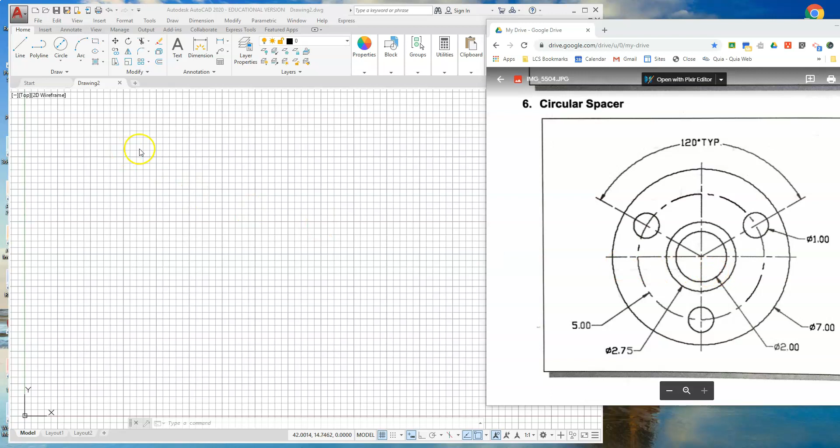So let's start laying this out. I'm going to start with the lines first, because I want to go ahead and draw my center lines for my construction lines. So I'm going to turn the grid off and just draw a couple lines.

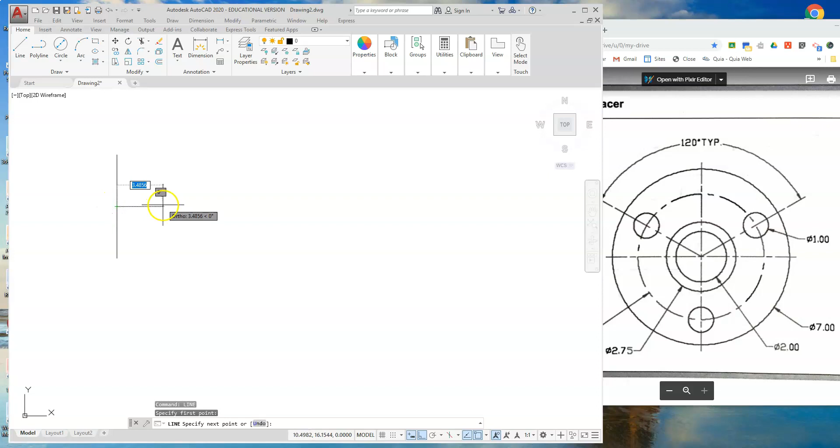So the largest diameter is 7. I'm just going to draw 2 lines, 8 inches. I'm going to draw that 8 inches down, then come up here and find the midpoint of that line, going 4 to the right. I can pick on the end of that line and move that grip, type in 4, and it will extend that line 4 units to the left. So I've got 2 lines drawn instead of having to draw just another little 4-inch line.

So I'm going to start with the largest circle. The largest circle is a 7-inch diameter. I'm going to come over here and do circle diameter, and lay that 7-inch diameter circle out. Then I'm going to go to the other 2.

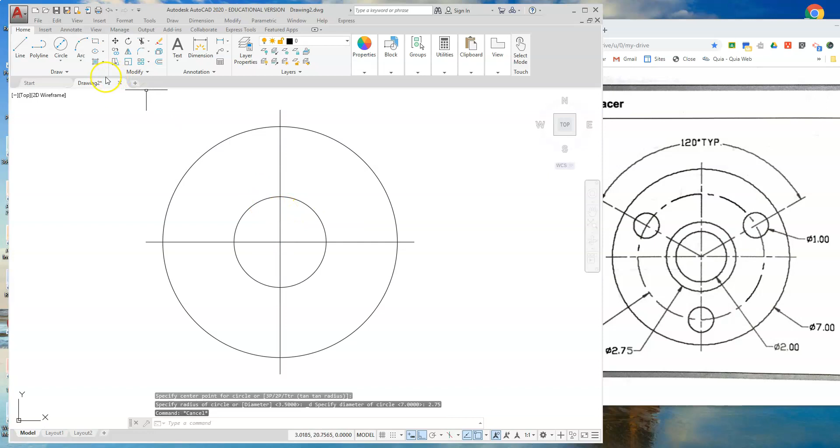These are object lines, so that means they're solid. That's why I'm going with those next, skipping over this one with the center lines. So this one is 2.75 and that one is 2. Using that circle diameter command just alleviates having to calculate the radius. I'm making sure I use the information given to me so I don't have a math error. Alright, so I've got those 3 circles drawn, and now I need to locate the other 3 circles.

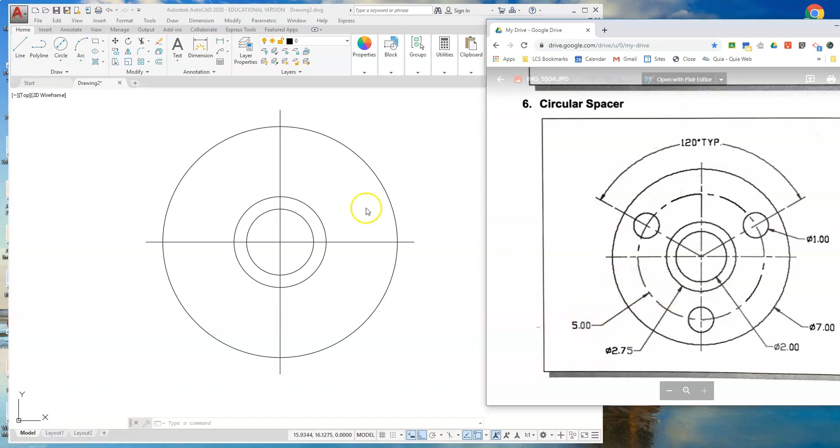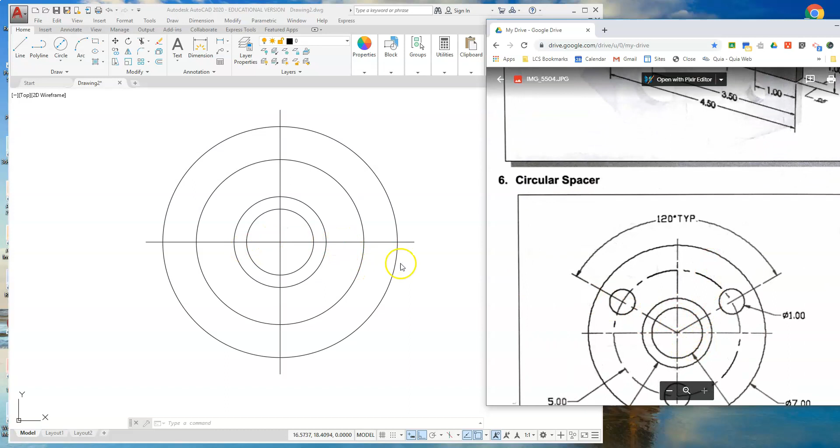Like I was showing you before, they did leave off that diameter, but that is a 5-inch diameter circle. So let's go ahead and draw ourselves out a 5-inch circle diameter. You're not going to have the center lines right now, so you'll just have to remember that that is your construction line, and we're going to use that for the 5-inch circle. So the first one is going to be located down below, where that line and that circle intersect.

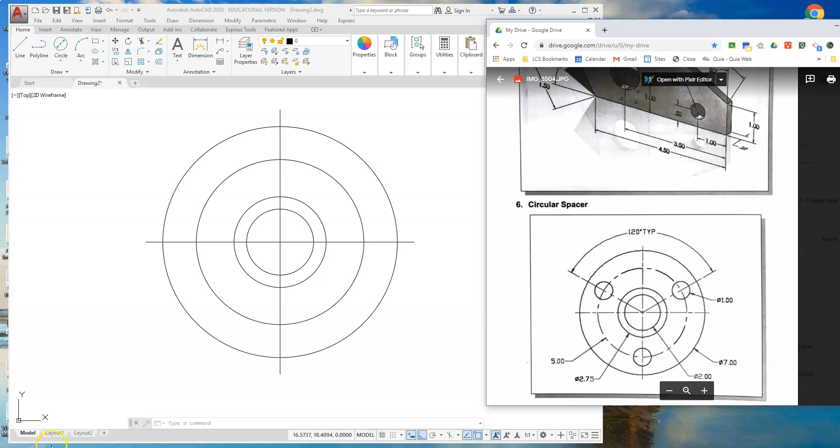What is the size? A 1-inch diameter. So typically there'll be a note here that says 3x. Let me write that on there so you'll see what that's going to look like. Alright, so typically that says 3x, diameter 1, and that would be a normal notation for that.

So we need to... let's just exit out of that. There we go. So I just want to go into my line command and draw a line for this angle here. So we've got 120 degrees. We're going to take 180, because it's 180 from here to here, of course. So subtract 120, that's 180 minus 120 is 60.

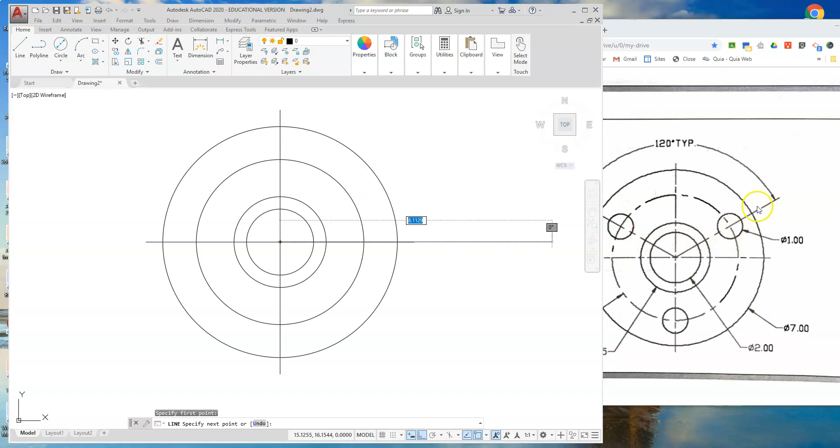So we've got 2 angles over here. There's nothing to make me believe that this isn't symmetrical. So I'm going to say 30 degrees over here on this side and 30 on this side. So I'm going to take my...

Line command and draw an 8-inch line. Turn my ortho off, 8-inch line, hit the tab button and type in 30 degrees, and that's going to be the location of the first one. And this one over here is going to be 8 inches as well. Hit tab, and it's going to be 30 off of 180 degrees, so that's going to be 150. So that's going to give me the location.

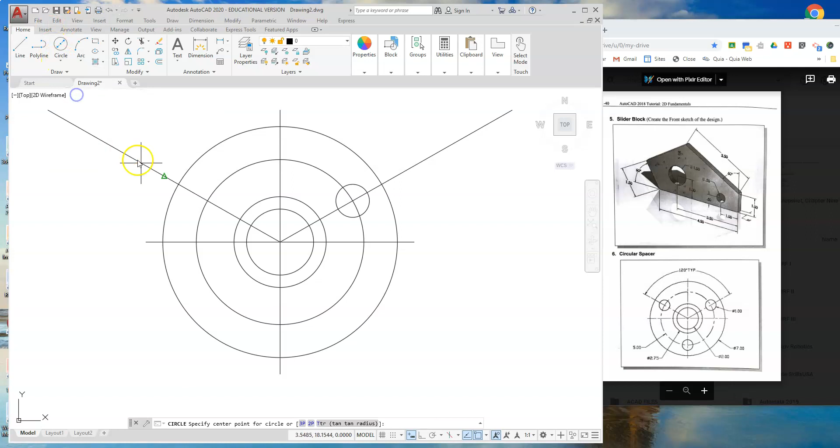So I'm going to knock out the rest of those circles with a 1-inch diameter. Oops, up - that's what happens when you don't go back and hit that command. You always have to go back and do circle diameter. When you hit repeat for that, it always goes back to circle radius.

So if you're using circle diameter, you have to go to circle radius. Or you can always do this: if you go to circle radius and want to use the diameter instead, you can type in D and hit enter, and it will allow you to specify the diameter. So circle radius, if you specify the point, it prompts you either for the radius, or you can type in D, hit enter, and then type in the diameter. That's just a way to work around it.

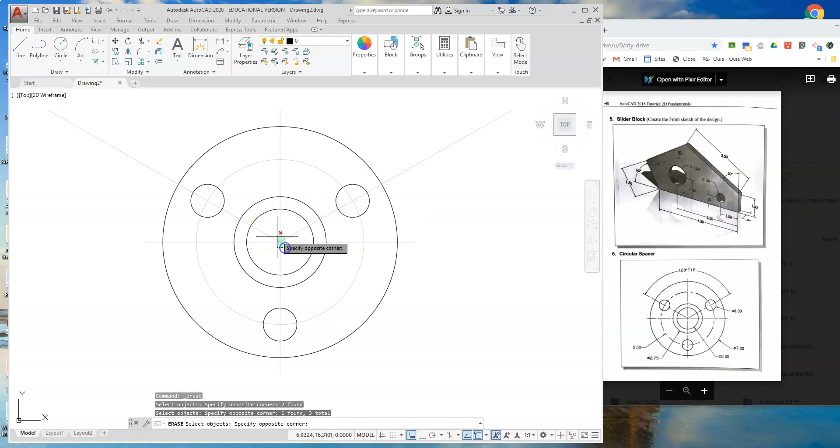So to finish this one up, I'm just going to go back and erase my construction lines. I don't need to leave those on here, and that would be the final product for that one. So save this as circular spacer.